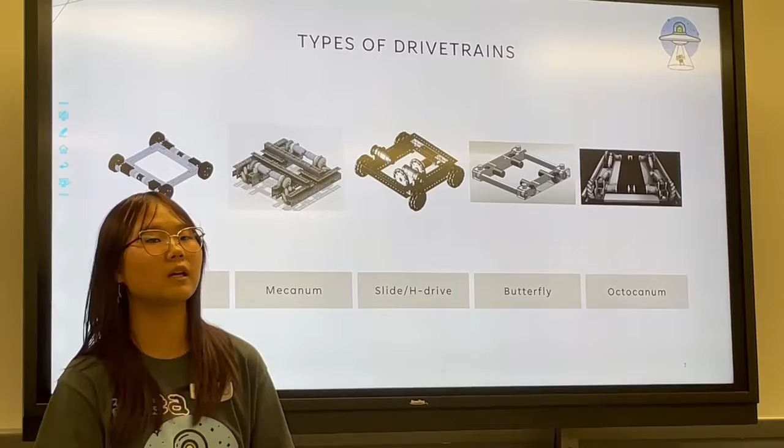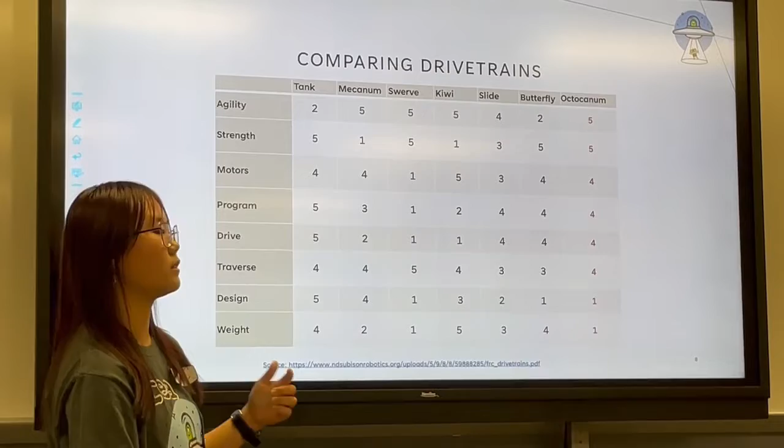So this is a quick table summarizing all the aspects of different drivetrains. Just to clarify, agility means reactiveness, or just agility actually. And strength is push force. Motors is the number of motors it uses, so the lower the number on this chart, the more motors it uses. And program means how hard it is to program. Drive means how hard it is for the drivers to control the drivetrain during the games.

Traverse is essentially strafing. Design is how complex the design is, so the lower the number is, the more complex it is. And weight would be just how heavy it is. Some of the numbers are from other teams' experiences, and there's not a lot of teams that use Octocanum. So the column for Octocanum is our estimate based off of Butterfly Drive and Mecanum Drive.

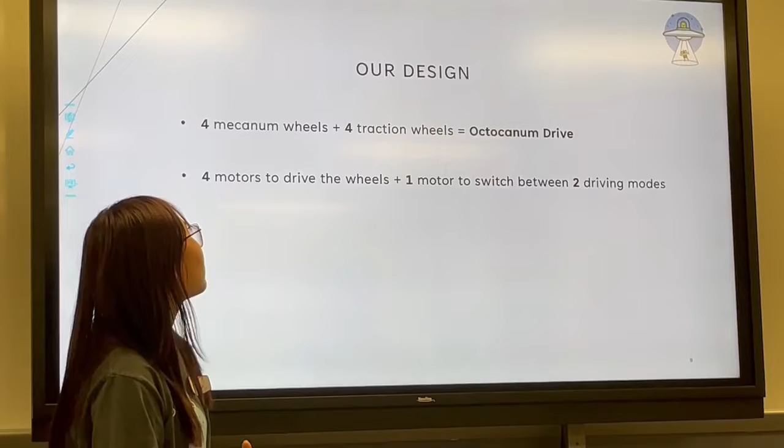So after analyzing all of that, we decided that Octocanum Drive would be the best for us, using 4 Mecanum wheels and 4 traction wheels. We're using 4 motors to make the wheels rotate, and also 1 motor to switch between 2 driving modes, and I will get to that on the next slide.

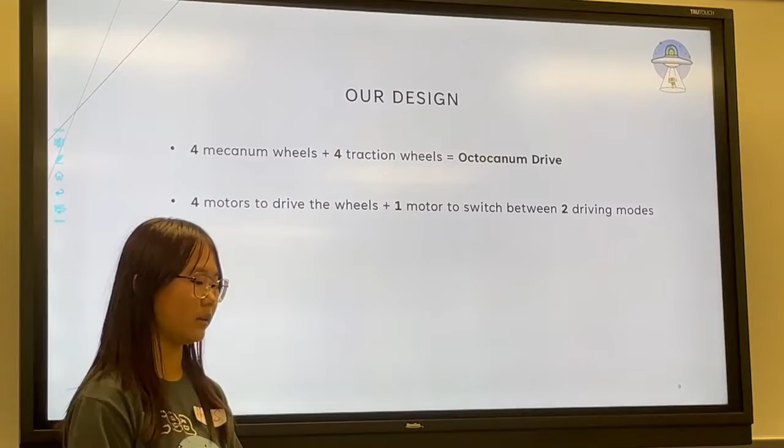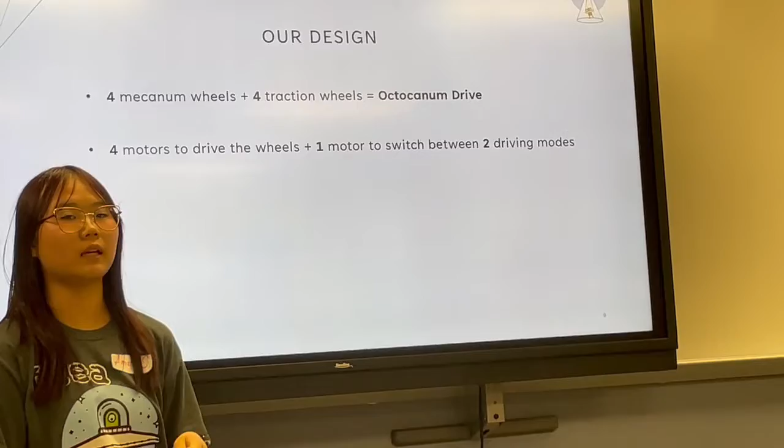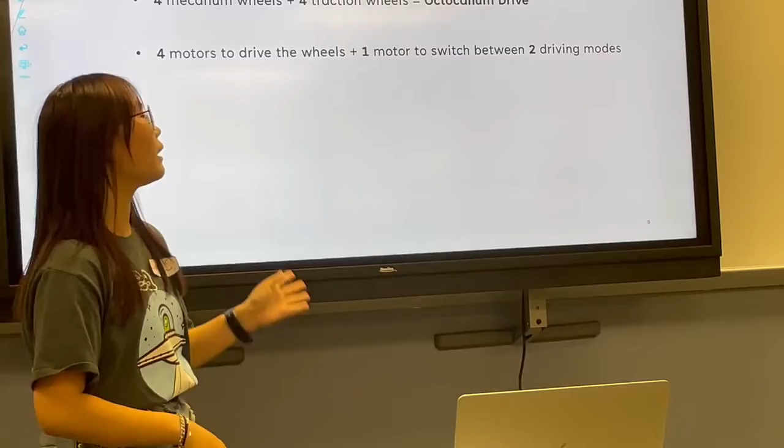Real quick, most teams that use Octocanum or Butterfly use 6 motors, 4 to rotate the wheels and 2 to switch between driving modes. FRC teams sometimes even use 8 motors in total, but we can only use 8 in total for the whole robot due to limitations. So we wanted to use as few motors as possible.

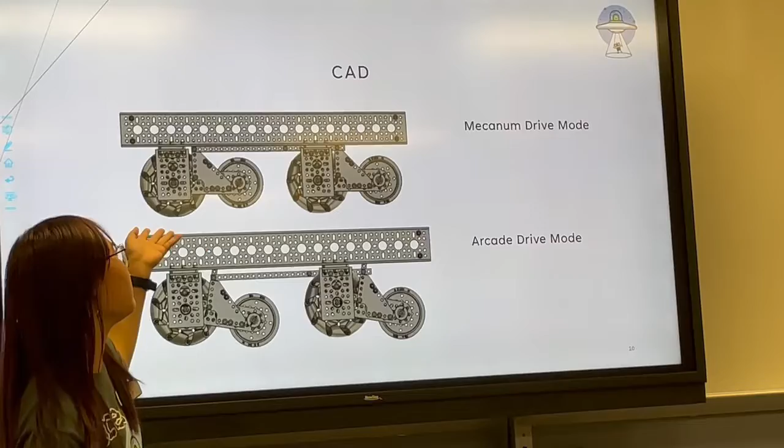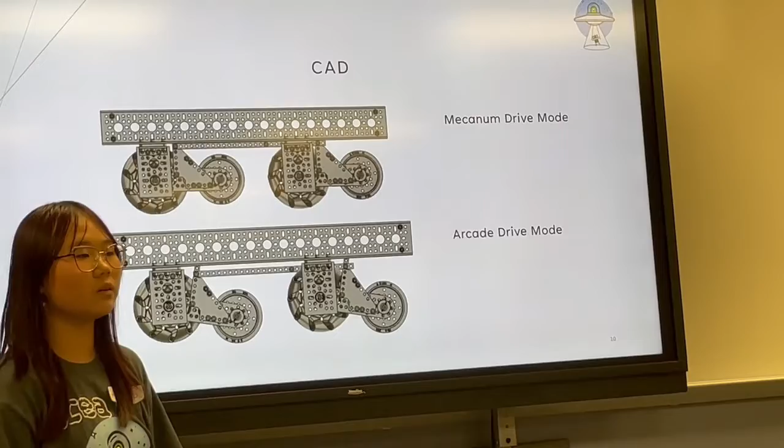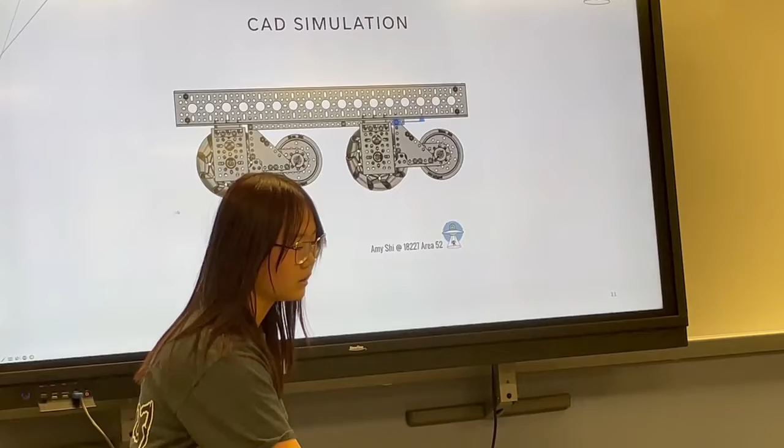And these are side views of my CAD design. When the traction wheels are up, the programming would just be using regular Mecanum Drive. And when the traction wheels are down, it would be arcade drive mode. You could also use tank drive if you wanted, but arcade would be a bit better. And then this is a CAD simulation of just the traction wheels going up and down.

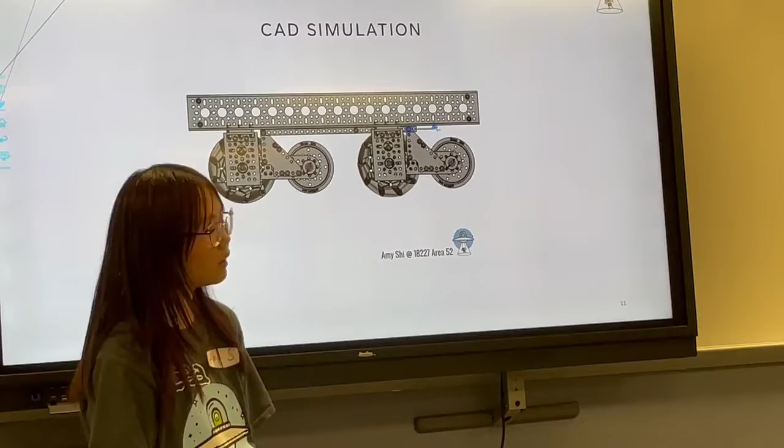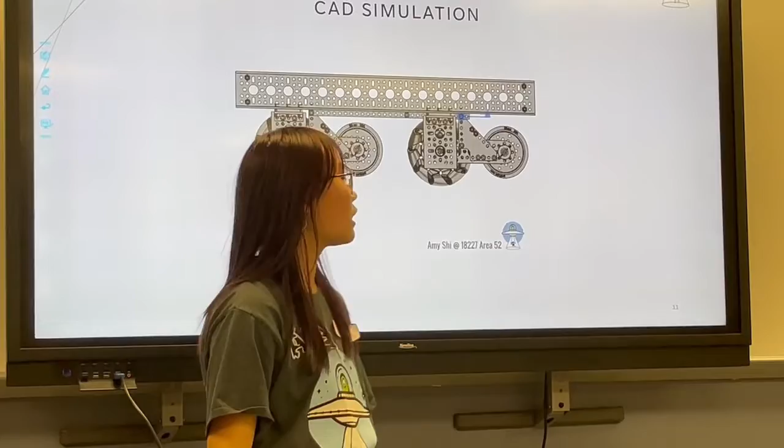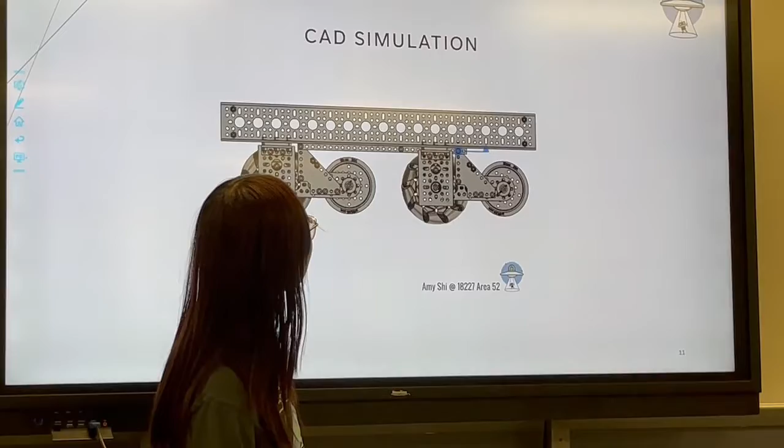So on the last one that you showed, how does the power get transferred to the traction wheel? To the traction wheel? So there's a motor that's linked to this Mecanum wheel, and then we're using chains. There's a chain between the two. Yeah, between these two. So technically, this one's the only one that's linked. So even when it is up, it is still moving? Yeah, it's still turning.

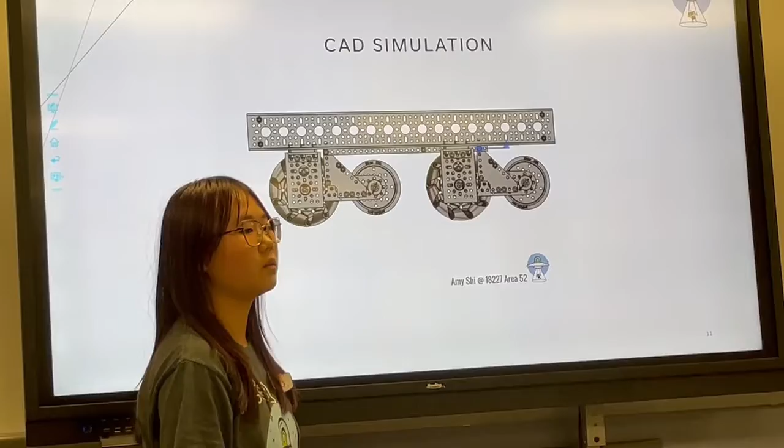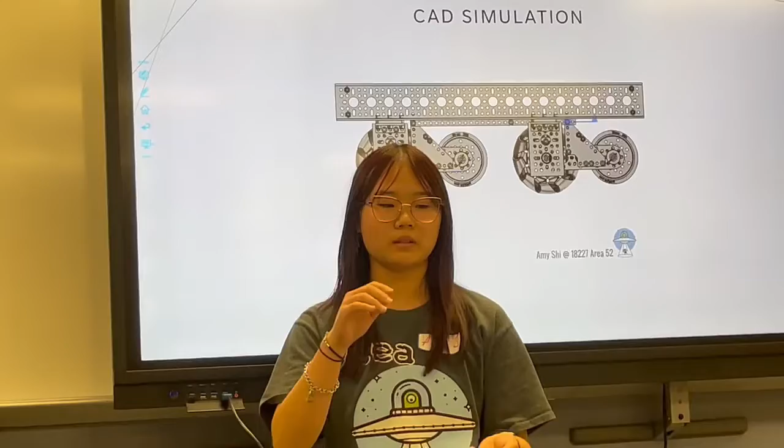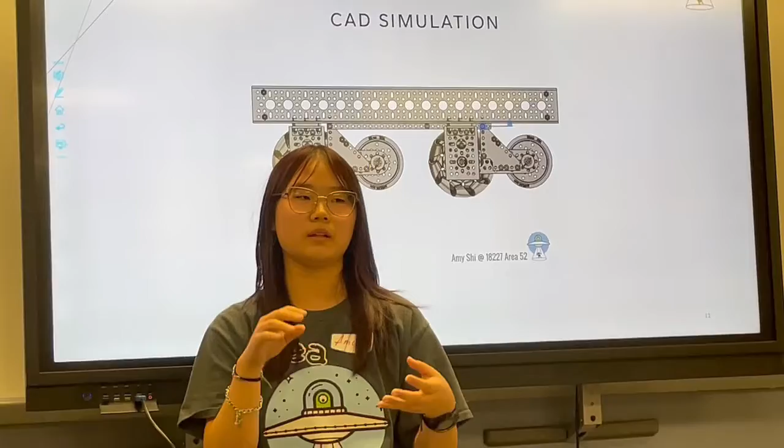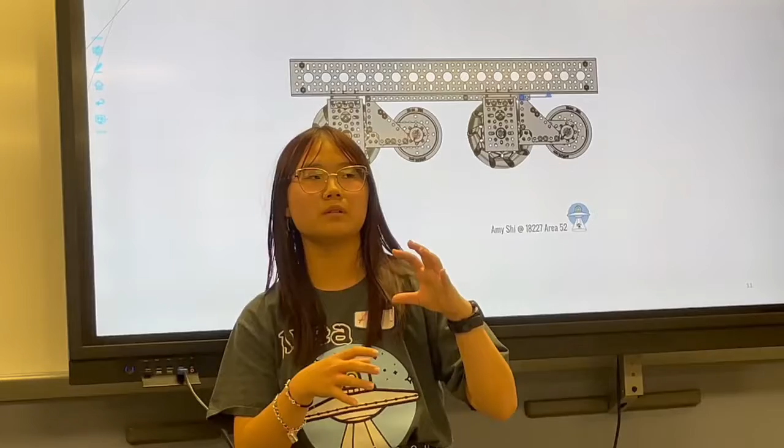Do you know if that actually helps when you get stuck? When there's barriers, obviously the barriers will be raised. So if you have your Mecanums down and you're stuck, you could get your traction wheels down, and it's going to be useful because there's more traction, and at the same time the Mecanum wheels are above, so they might touch the barrier and could help get it over, even though they're not touching the floor.

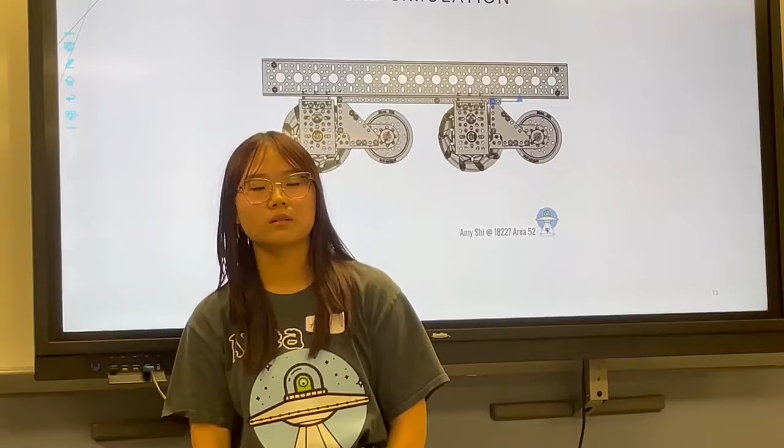What caused it to, sorry. You had your hand up, sorry. I didn't want to hog the questions.

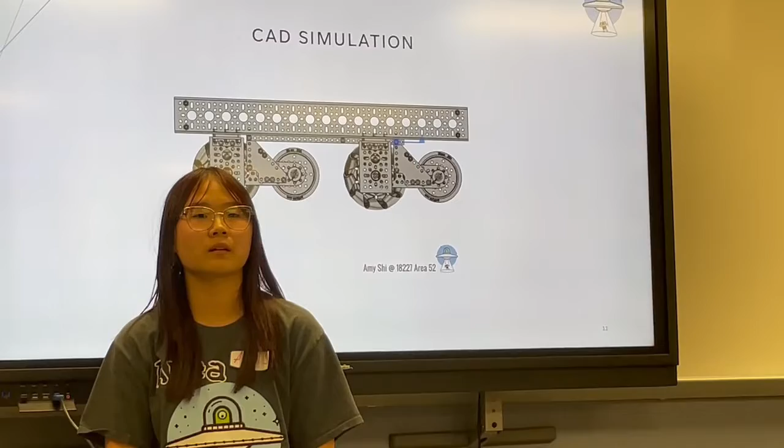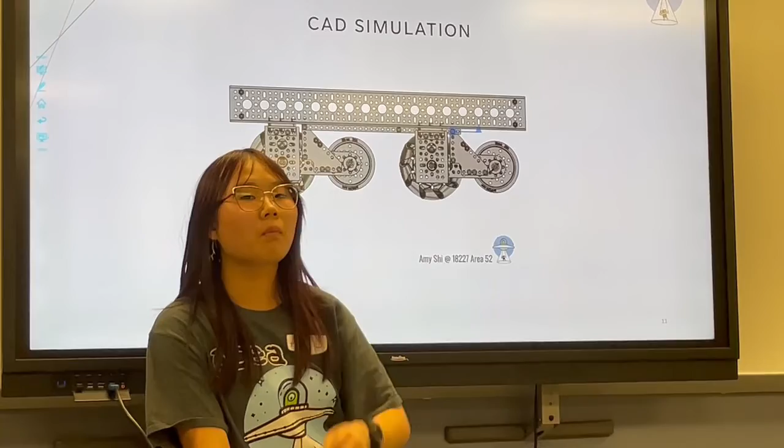What caused that second wheel to go down again? Besides the driver saying lower that rail, right? But we have a beam connecting that. The specific details I still have to figure out for now.

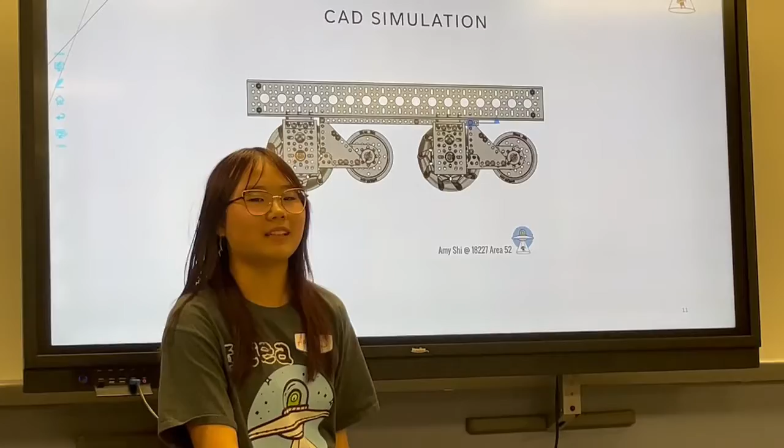Okay, great job. Amazing. Thank you. Thank you.